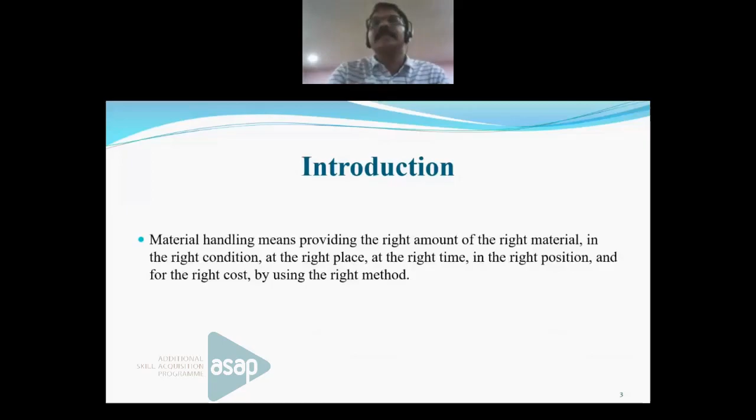So this is the fundamental introduction of material handling systems. Another aspect is it applies to the movement of raw materials, parts in process, finished goods, packing materials, and disposal of scraps.

So while transmitting or transferring materials, it may be in the form of raw materials, it may be partially working condition material or part in process, it may be finished work, it may be packing materials, as well as it may be scrap. Which means when we design any material handling equipment, it shall be capable of transmitting raw materials, in-process inventory, finished stock, packing material, as well as scrap.

Scrap is also very important because sometimes in big industries, scrap itself is huge. The weight may be huge. So the handling systems must be capable enough to handle the scraps as well.

In general, hundreds and thousands of tons of materials are handled daily, requiring the use of a large amount of manpower, while the movement of material takes place from one processing area to another, or one department to another department of a particular plant. That means huge manpower is required.

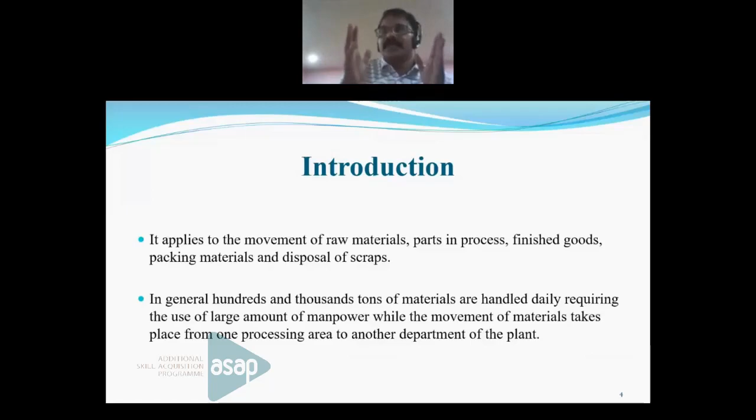Similarly, thousands of tons of material are to be transmitted. So it is very tedious work. We have to be very serious, and take it into serious consideration in material handling as far as an industry or a production plant is concerned.

So the basic definition of material handling is that material handling is the movement and storage of material at the lowest possible cost through the use of proper method and equipment.

Material handling means there are two aspects: one is movement, the second is storage. So whether it is raw material, process material, or finished goods, we have to move that material as well as safely store that material at a particular place, or keep that inventory.

So both of these aspects must be done effectively, and the cost shall be minimum, and proper method and equipment shall be used for transferring as well as storage of the material.

Another definition is material handling comprises all of the basic operations involved in the movement of bulk, packaged, and individual products in a semi-solid, solid, or liquid state, by means of machinery and within the limits of the place of business.

Sometimes we have to transfer bulk material, sometimes we have to transfer unit material like individual products. And the state, the property of the material may be liquid, may be solid, may be semi-solid. So according to the requirement, we have to design the material handling equipment for that particular plant.

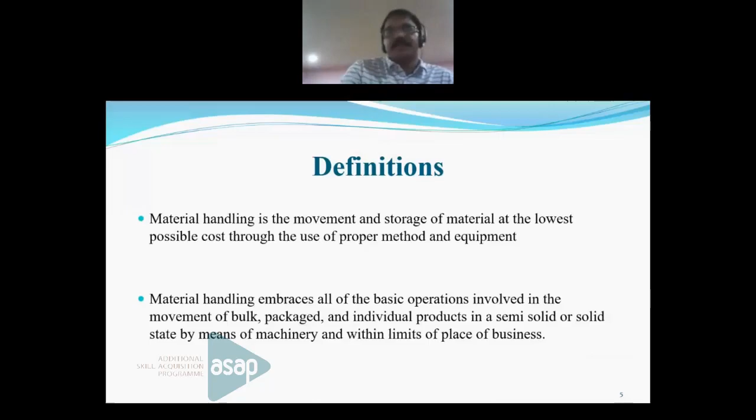The next one is the objectives of material handling. As I mentioned, the primary objective of material handling is to reduce the unit cost of production. If you take any manufacturing facility, the primary objective is to minimize the total cost or maximize the profit. In overall cost, one part is contributed by material handling. So if you reduce the cost of material handling, we can reduce the overall cost of production so that we can maximize the profit.

This is the main objective. Then the subordinate objectives are to reduce manufacturing cycle time. It's very important.

Reduce manufacturing cycle time - what do you mean by cycle time? Cycle time means the overall time required for completing a particular product. During that operation time, some time is definitely required for material handling. So if you optimize the time requirement, you can reduce the overall cycle time for the production of that material.

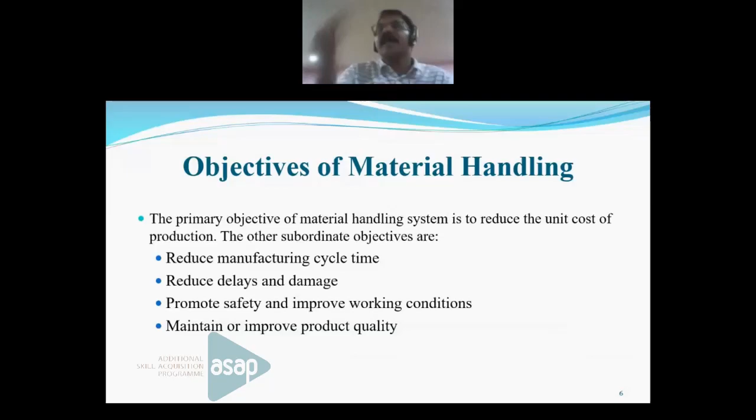Then another objective is to promote productivity. Productivity means we have to increase the production rate. In order to enhance productivity, we have to follow a straight line transmission - material should flow in a straight line, meaning we have to avoid zigzag movement and unnecessary movements.

So we have to decide an optimum path, and accordingly install or erect the material handling equipment. Material should move as short a distance as possible - that is also very important. While transmitting material from one place to another, there are different paths, so we have to optimize the path so that the distance moved is minimum.

That is another objective. Then the third objective in this session is to use the gravity concept. Wherever we can implement the gravity concept, we can use it so that we can reduce energy and power requirement, because no energy or power is required if we utilize the gravity concept. We can transfer material from a higher level to a lower level using some path, following the gravity concept. If we can implement that procedure wherever possible, we can reduce energy, and that will also enhance productivity.

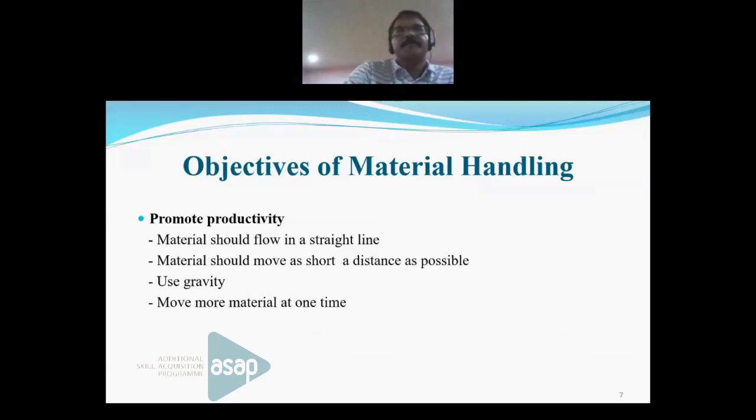Then another aspect is increase the use of facilities. We have to enhance facility utilization. The first point is promote the use of building cube - we have to utilize whatever building area is available. Then purchase versatile equipment - versatile equipment means equipment that can perform different operations. Instead of using a single operation, we can purchase equipment that can be utilized in different environments and situations. So purchasing versatile equipment is very important.

Then develop a preventive maintenance program. Preventive maintenance, as we all know, is routine maintenance in order to avoid a breakdown. According to the requirement of different material handling equipment, we have to design different preventive maintenance programs. For a particular material handling equipment, one procedure may be followed, but it may not be suitable or effective for another. So for another material handling equipment, we have to design another preventive maintenance program in order to avoid breakdown.

Then maximize the equipment utilization. As we all know, equipment is available to us for 24 hours, so we have to utilize the equipment at the fullest level. These are the objectives that come under this particular category - promote increased use of facilities.

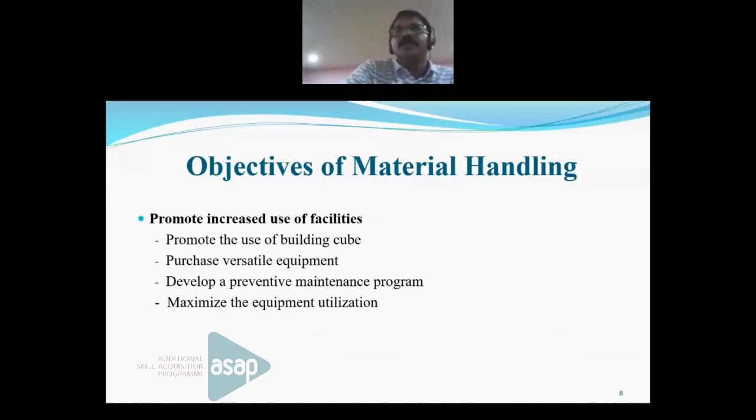Next topic is material handling, selection of material handling equipment. There are different factors to consider. First is the properties of the material, whether it is solid, liquid, or gas, and the size, shape, and weight. According to this heterogeneity, we have to design the particular handling equipment.

We have to take all these factors into consideration while selecting equipment. The second point is layout and characteristics of the building. Suppose for a particular plant the roof level is low, so we could not implement heavy material handling equipment. If it is a multi-story building, we have to select equipment accordingly. So according to the layout and characteristics of the building and plant, we select the handling equipment effectively. The next one is production flow.

Production flow means, suppose if it is continuous production, job shop, or batch production, we have to use different techniques. Continuous production means mass production, where the same quantity and type of material is produced for a particular period of time. For example, for one month, the same nut and bolt, thousands or lakhs of them, are produced continuously. That is called mass or uniform production. In that scenario, we can use something like a conveyor belt, which is apt for that situation. So according to the production scenario, we design the material handling equipment effectively.

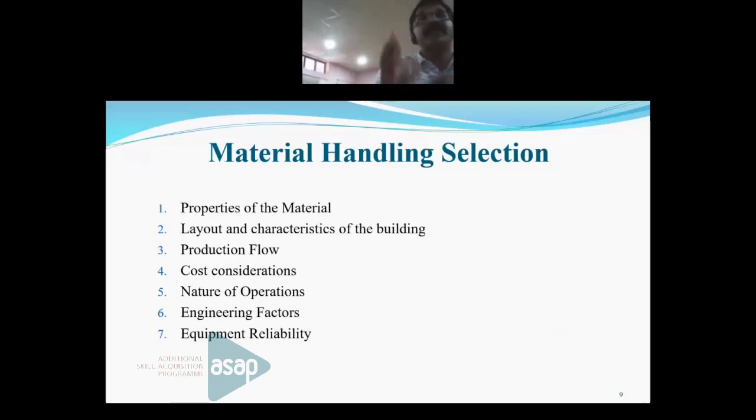In batch production, different materials are produced at a particular time, so different components are being produced. For this, we can use trucks for transferring material from one place to another. So according to the production scenario, we can differentiate and select the handling equipment accordingly.

Then cost consideration. According to the cost requirement, we can only purchase certain materials, so cost is an important factor while selecting any material handling equipment.

The nature of operations is also very important, somewhat similar to production flow. If it is mass production, we select material handling equipment accordingly, and if it is batch production, we select materials accordingly.

Then engineering factors, such as floor conditions and structural strength. If the structural strength is not rigid enough, we could not use heavy material handling equipment. So we have to consider the building strength, structural stability, door size, floor area, and the nature of the floor situation. All these things come under engineering factors.

Then equipment reliability is also very important. This means our equipment shall be reliable, so that continuous or frequent breakdown shall not occur. So when we purchase any equipment, we have to look into the reliability aspect seriously.

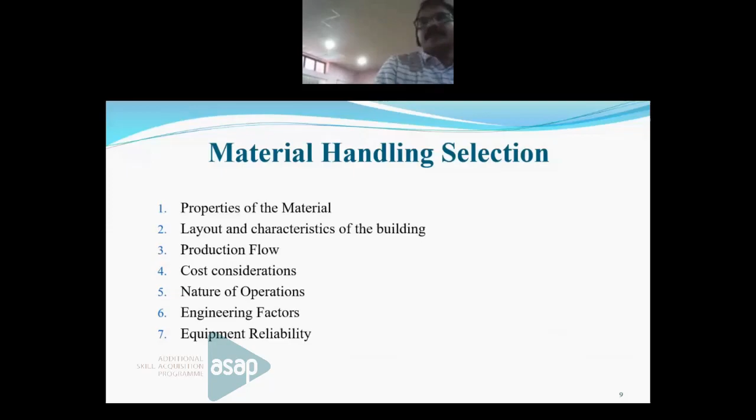Next topic is the importance of materials handling. This is a summary of what we have discussed so far. It improves the efficiency of the production system, it is self-explanatory, it cuts down indirect labor cost, and it reduces damage of materials during storage and movement, as I mentioned earlier. It maximizes space utilization for proper storage of materials, thereby reducing storage and handling cost. Using this, we can reduce the overall cost.

It will minimize accidents during material handling, which is a very important safety aspect. It reduces overall cost by improving material handling, and it also improves customer service by supplying materials in a convenient manner for handling. So these are the importance of material handling.

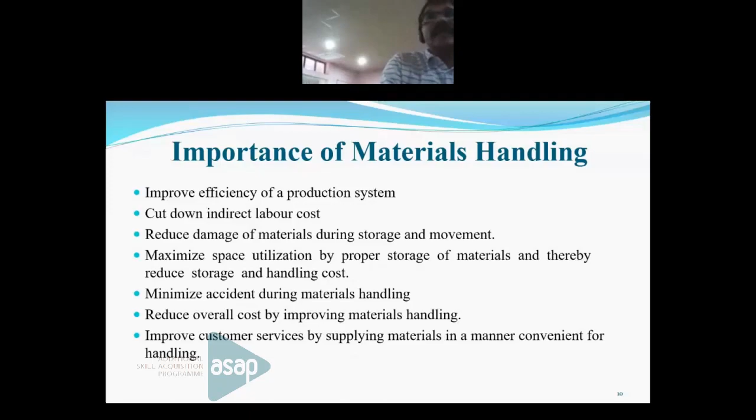The next important topic is what are the factors to be considered while designing a material handling system. The first factor is material.

The form of material, whether it is gaseous, liquid, semi-liquid, or solid, determines how we classify the material handling systems.

If it is a liquid material, or toxic or corrosive type material, we can use containers. If it is semi-liquid or powder type, we can also use containers for transferring materials from one place to another. If it's a solid one, we can use overhead cranes, hoists, winches, or trucks for solid materials.

The next aspect is nature, whether it is bulk, unit load, individual items, fragile, sturdy, or bulky.

What is a unit load? Unit load means the same material, same dimension, and the material looks similar. For example, take a brick - that can be considered a unit load, since different bricks have the same size, dimensions, and appearance. Similarly, if you place 10 of those same bricks in a casing, that may also be considered a unit load, loaded onto a particular truck or wherever. That is what is meant by the unit load concept.

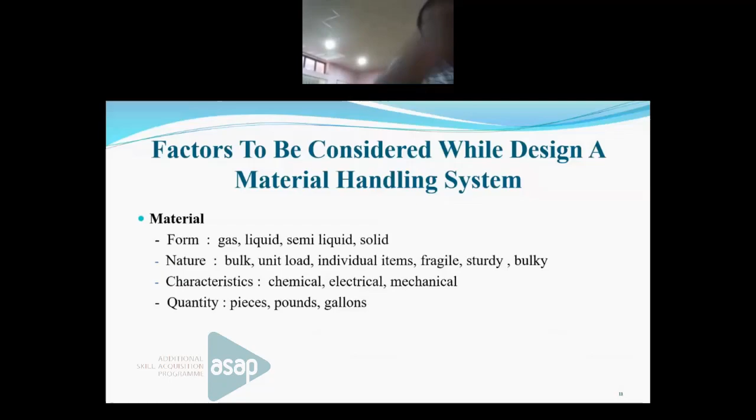Then quantity, whether it is in pieces, in terms of weight like pounds, or in liquid form like gallons. So quantity is another factor, and accordingly we have to design the system.

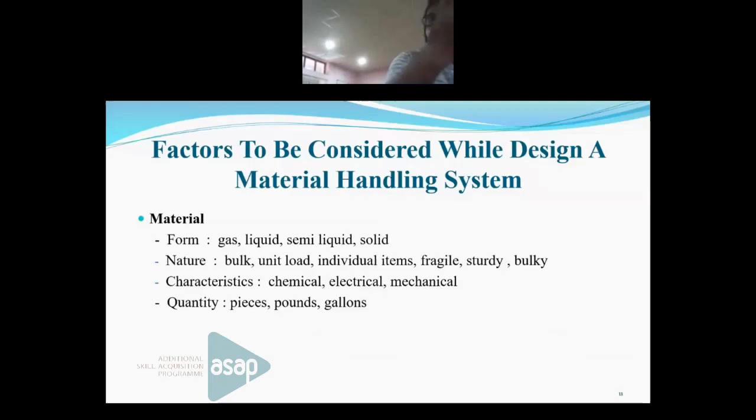The next important factor is the movement of the material - the source and destination. While transferring materials, we have to receive the material and stock it, or keep it in a warehouse. Then it may be transmitted to the shop floor. After completing the work, it may again be stored in the finished stock room. So source and destination - throughout, movement is there, and we have to consider this factor for the design of the equipment.

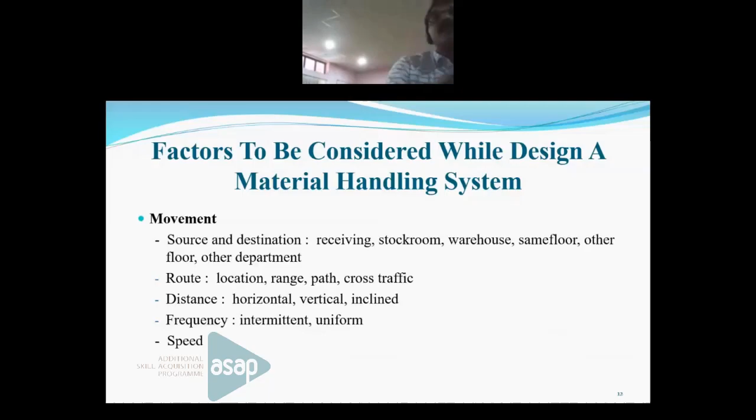The next one is the route - meaning the location, the range or path, and cross traffic. This is an important term. In many industries, during material transfer, simultaneously different types of materials are being transmitted or transported at the same time. So we have to avoid cross traffic - when a particular heavy material is being transported from one place to another, we shall avoid cross traffic in between. So we have to design an optimum route or path for effective transportation.

The next one is distance - whether it is horizontal movement, vertical movement, or inclined movement. Accordingly, we have to design our material handling system. This is an important factor.

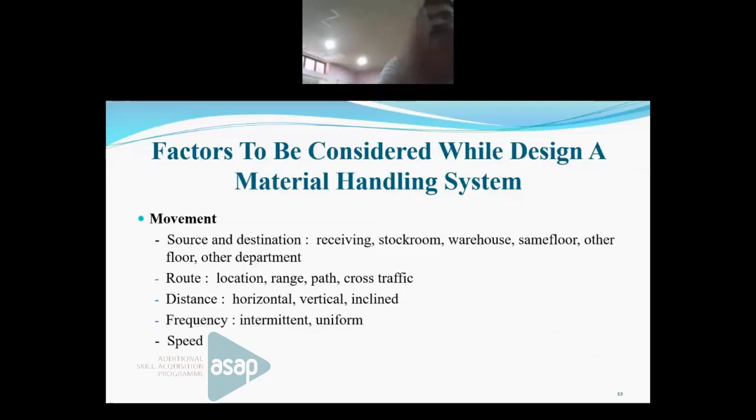Then frequency - whether it is intermittent production or uniform production, as I already mentioned. Uniform production means continuous mass production, while intermittent production also needs to be designed for accordingly. Then speed is also very important - the speed at which it is being transported is another factor.

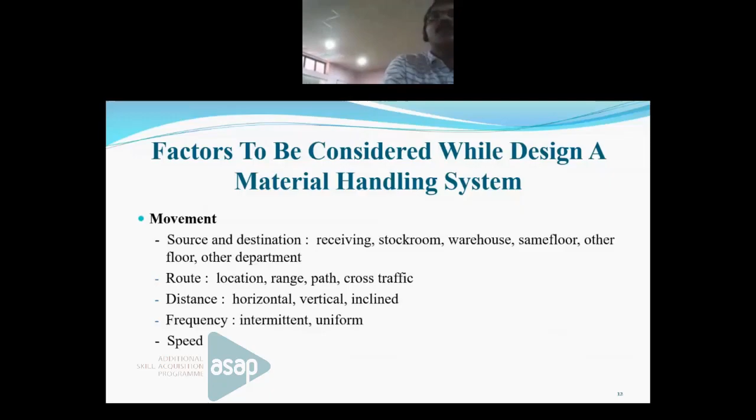Then another factor is methods - whether it is unit or load, manpower, or equipment. Whether it is bulky items, individual items, or container items, we have to consider this factor. Then manpower - whether it's a single man, several people involved, or none, meaning we can mechanize the system. Then equipment - conveyor, overhead cranes, forklifts, trucks. So different equipment can be selected according to the requirement.

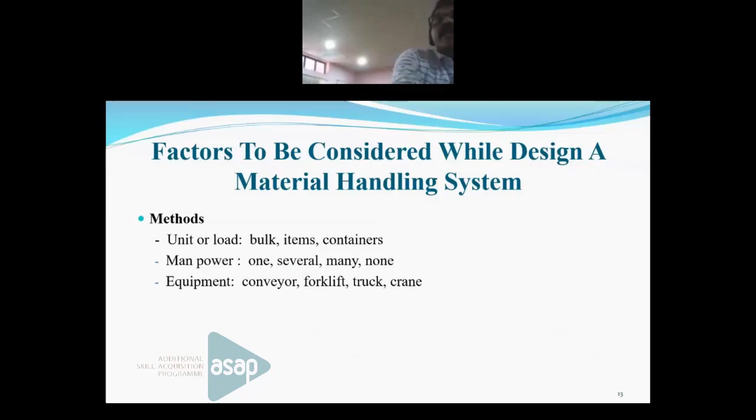The next topic is the systems concept of materials handling. The system concept means, if we take a production system as a whole, that may be considered as a system. But material handling is a subsystem of that main system. So in order for the main system to work effectively, the subsystem also has to work effectively. That's why the material handling area is very important as far as a production system is concerned.

Unless the material handling system works properly, the total system won't work effectively. So this particular area may be considered as a subsystem. There are so many subsystems, and all of them shall work together, synchronized, in order to improve the effectiveness of the main system. This is the system concept of material handling.

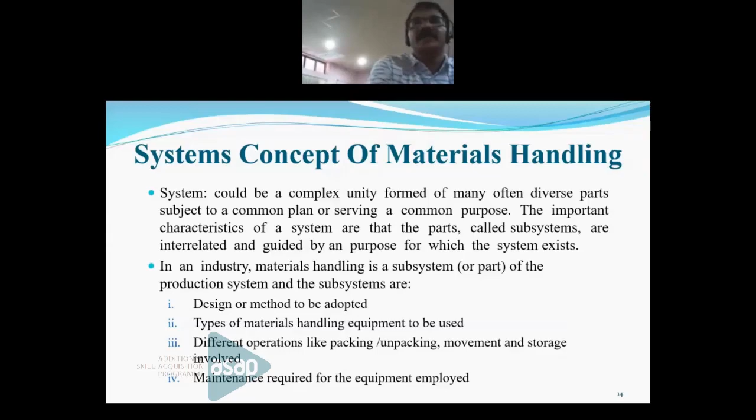Then types of material handling methods. There are 5 types. One is movement - this is the actual transportation, the actual movement of material from one place to another. The next one is quantity - how much we can transfer, how much volume we can transfer. This dictates the type and nature of the material handling equipment, and also the cost per unit for conveyance of the goods.

Next aspect is time - how quickly the material can be moved from one place to another. If we have to move very quickly, we have to select the handling system accordingly. Then space requirement - if the available space is very less, we could not erect big material handling equipment, so space is a constraint. According to the available space, we have to optimize the material handling equipment.

The next one is control. Control means the proper identification of the material, proper inventory management - all these aspects come under the control area. So these are the different types of material handling methods: movement, quantity, time, space, and control.

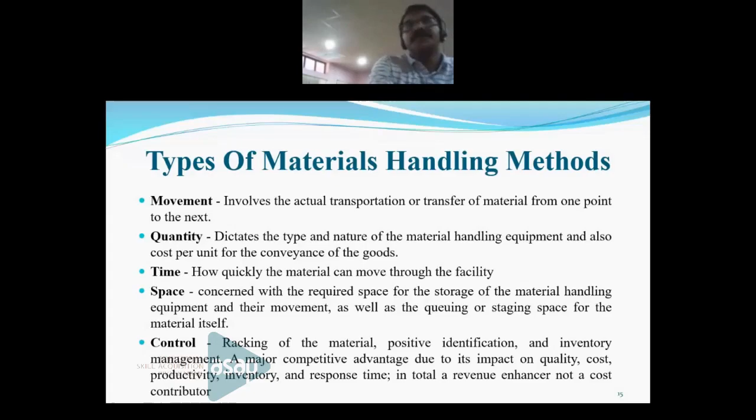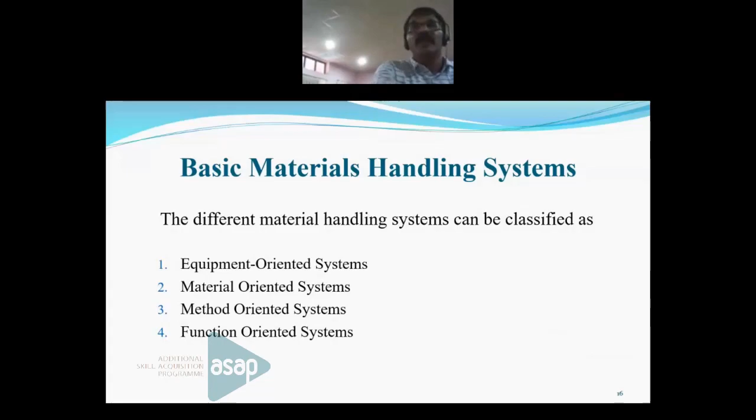Then basic material handling systems. The different material handling systems are: one is equipment oriented system, the second is material oriented system, the third is method oriented system, and the fourth is function oriented system. These are the four different material handling systems.

The first one is equipment oriented system. From the heading itself it is clear that it depends on the equipment used for transportation. One is overhead systems, like overhead cranes, jib cranes. Then conveyor systems - belt conveyors, roller conveyors. Then tractor trailer system, forklift truck and pallet system, industrial truck systems, and underground systems. These are the commonly used equipment in the material handling scenario.

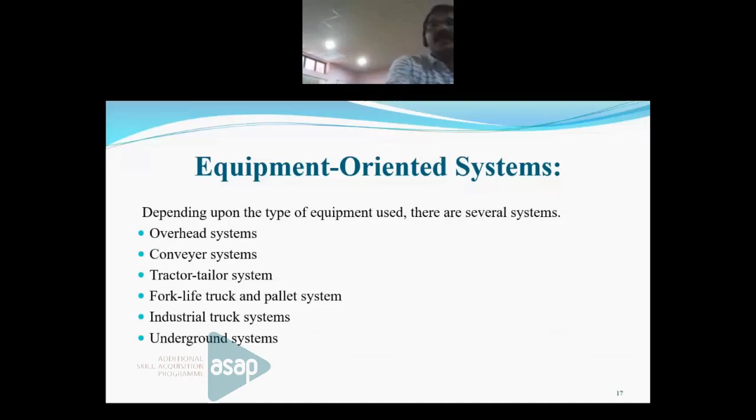Then another system is material oriented system. As already explained, unit handling systems - whether that particular equipment is handling units only. Unit means the same type of material, all similar, which may be transmitted from one place to another - that is unit handling system. Bulk handling system means it is not similar.

Then liquid handling system means the form is liquid. A unit load consists of a number of items so arranged that it can be picked up and moved as a single entity, such as a box. It may be considered as a box, bale, roll, etc. Such a system is more flexible and requires less investment, so the unit load concept can be followed because it involves less cost.

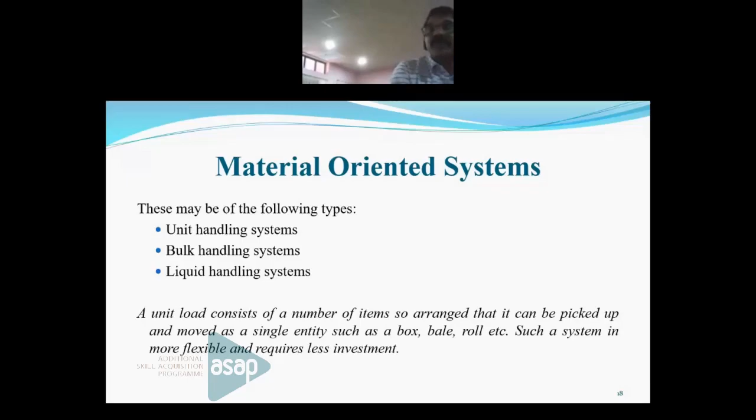Then another type of system is method oriented systems. According to this system, we can classify systems such as manual systems - there is no automation or mechanization, it is being operated manually. Then the next one is automated system. Then job shop handling system - job shop production means different types of materials are produced at a particular time. Then mass production means uniform production, the same type of products being produced at a particular period of time. So this is method oriented systems.

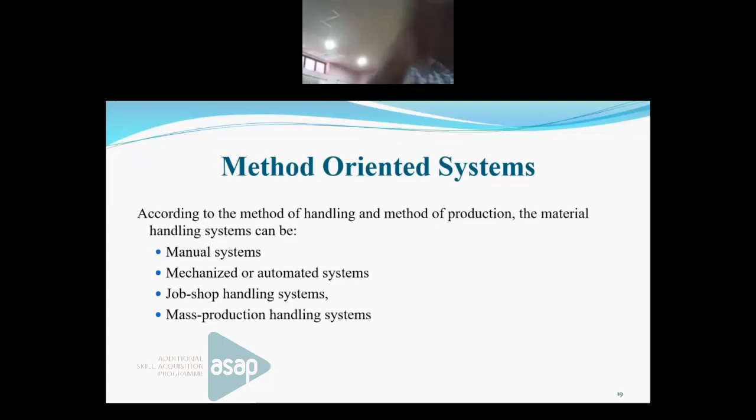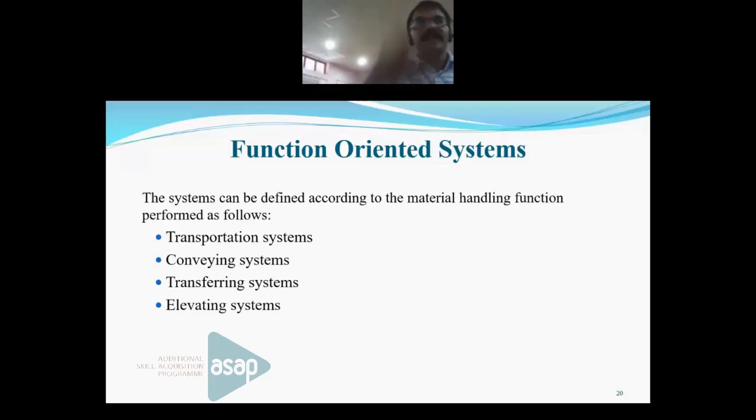Then the last one is function oriented systems. These include transportation systems, conveyor or conveying systems, transferring systems, and elevating systems - these are the four classifications of function oriented systems. Elevating system means material may be elevated from one point to another, raised in an elevator system. Transferring system means it is being transferred from one place to another place. Conveying and transportation are very clear.

Then factors affecting selection of materials handling equipment - all these points are self-explanatory.

Then load capacity. For a particular equipment, we have to ensure the maximum load capacity. Then speed, we already mentioned that. If the operation is done quickly, we can improve productivity as well as reduce cost, so speed is important. Then space requirement, already explained, whatever available floor area we have, we have to utilize that available space.

Then supervision required. The level of supervision, if it is manual, 100% supervision is required. If it is automated, that supervision level may be 10% or 5%. If it is partially automated, that level of supervision is required. So that also we have to take into consideration.

Then ease of maintenance. As I mentioned, maintenance of each and every equipment is very important. As we already discussed, we have to design a program for that preventive maintenance. So ease of maintenance is very important when we select equipment.

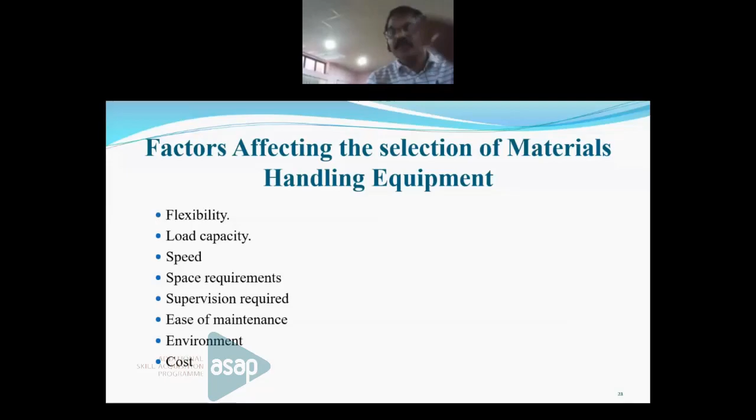Then environment is also a factor, cost is also a factor, this is self-explanatory. Then the last topic of our discussion is principles of material handling.

I mentioned around 20 principles. Part A is principles related to planning, and part B is principles related to equipment. This is a thumb rule. I mentioned 20 principles, but it may not be possible to implement all of them. Sometimes we cannot implement one principle in a particular situation, but that principle may be utilized in another situation. So that depends on the situation or the requirement, and we can follow these principles accordingly.

So the first one is the planning principle, it is very easy to understand. Then the system principle, I already mentioned.

Then simplification principle. Simplification principle means the equipment shall be simple, and the operation procedure shall be simple. So we have to follow this simplification procedure in order to utilize the equipment effectively.

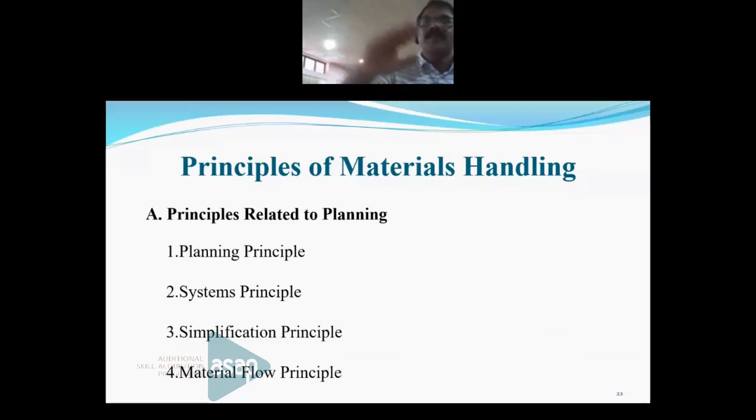Then material flow principle. Material flow principle means the smooth flow of material. We shall avoid zigzag movement and unnecessary movement. So the material flow shall be optimum, and straight line flow we can follow.

Already we discussed the gravity principle, already I mentioned it. Gravity principle means without using any energy or power, we can transfer material from one place to another using the gravity concept. The unit size principle also we discussed.

We can have a unit size of material so that the transportation is very easy. Then space utilization principle, I mentioned, we have to utilize the space optimally.

Then safety principle, it is also very clear. We have to use the safety guidelines according to the Industry Act or whatever it is, in order to safeguard the equipment and the human being. We have to follow the safety principle.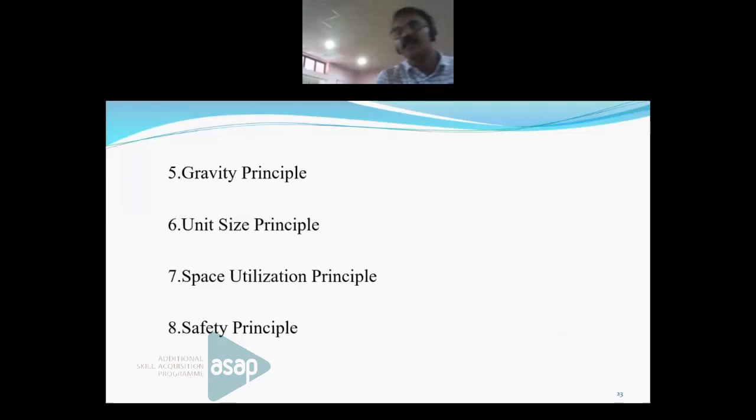These are the principles that come under the planning header. Then the remaining 12 principles come under principles related to equipment.

Then the mechanization principle. To what extent this equipment can be automated in order to improve efficiency and productivity, what extent we can mechanize or automate the equipment, that is what is called the mechanization principle.

Flexibility principle, we already discussed. Flexibility means that particular equipment can do different operations. It is flexible, it is adaptive. So that is what is called the flexibility principle.

Then the third one is equipment selection principle. We have to select the equipment according to the requirement, according to the effectiveness.

Then standardization principle. Standardization means some equipment is standardized, so we can operate that particular equipment safely and effectively even by an unskilled worker. So we have to follow the standardization principle wherever it is required.

Then the lightweight principle, it is very self-explanatory. We have to reduce the weight of the equipment as far as possible.

Then motion principle. Motion principle means the movement also we have to optimize.

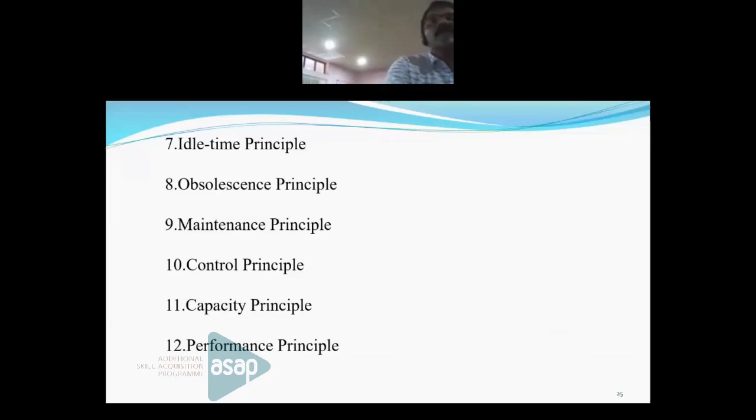Then control principle, then capacity principle, then performance principle. These are the 12 principles of material handling under equipment, and 8 more principles come under planning. So total 20 principles are there.

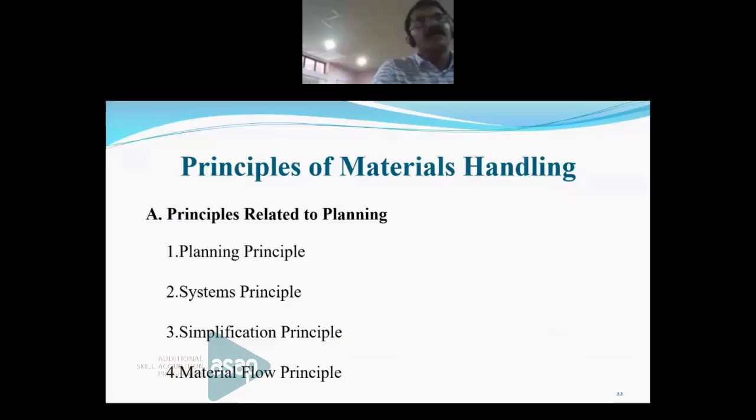As I mentioned, it is a thumb rule, so we have to use our wisdom according to the requirement. Then the last topic, the limitations of material handling.

Of course, additional investment is required, and then loss of flexibility to some extent. Breakdown may occur, and if breakdown occurs, the whole production will be stopped. Timely maintenance is required, unless we do the maintenance, the breakdown may occur.

So for maintenance, additional skilled maintenance manpower is required, maintenance spares, cost of maintenance, time requirement for servicing, and arrangement during this period to continue the production. So these are some drawbacks, some limitations of material handling.

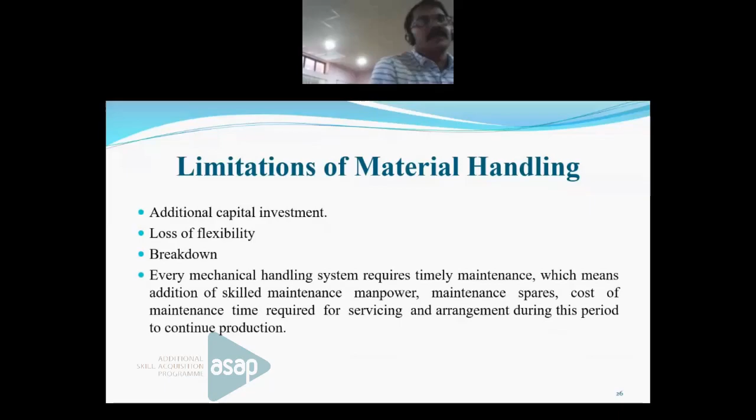Very clear, sir. The session was very clear, and we have reached the last 15 minutes of the session. Could you please conclude the session by giving an overall summary? Okay, sir. Then we will go on to the Q&A. Okay.

As I mentioned in the first part before introduction, in many industries this material handling area may not be considered seriously. That is an important aspect of any production scenario. I focused this particular session in view of production scenario, but this material handling aspect may be extended to many areas. I focused on manufacturing area, manufacturing aspect.

I focused to explain all these things, but this material handling area is very, very important. We have to consider it seriously, otherwise the total cost or the profit we cannot optimize. If we have a very effective material handling system, we can maximize the profit, we can reduce the cost.

As I mentioned, in system concept, this material handling is a subsystem. If you take the production scenario as a whole system, this material handling is a subsystem. We know that in system concept, if one subsystem cannot perform effectively, the performance or effectiveness of the whole system will break. We won't get the maximum effectiveness from the main system. So the subsystem also has to work effectively in order to get good results.

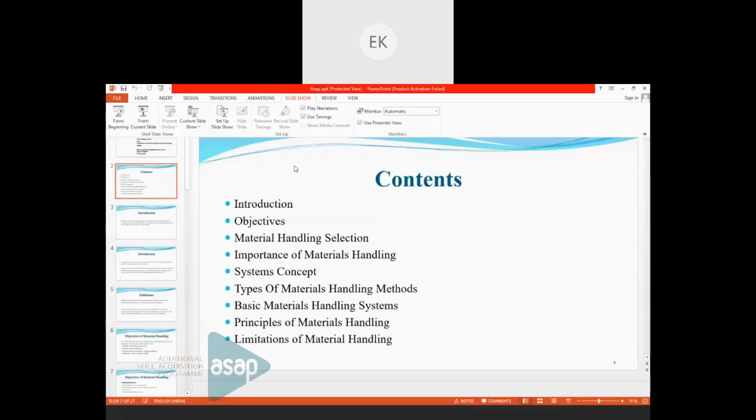And this unit size principle and gravity principle, as already mentioned, all these things are very, very important. That is being practiced in all industries.

So one important aspect is, out of these 20 principles, we have to select optimum principles for a particular situation. That is what effective decision making process is. So for a particular industry or production scenario, what all principles shall be utilized, what all things can be implemented in order to increase the effectiveness or productivity? Out of these 20 principles, we have to select the optimum principle for improving productivity. So that is a thumb rule, as I mentioned.

According to some experience, sometimes some trial and error method may be followed in order to select good principles. As an engineering student, as a mechanical engineering student, this material handling area is very important. Wherever you go, when you go to any industry, you will experience this aspect, material handling.

When we think about material handling aspect, we thought it is a very simple process, but it may not be like that. See, 1 ton, 2 ton or 3 ton materials may be transmitted in a restricted area without any damage. It is very difficult, so we have to design an optimum system for that. This area is very important as far as any mechanical industry is concerned. So that is the conclusion from my side.

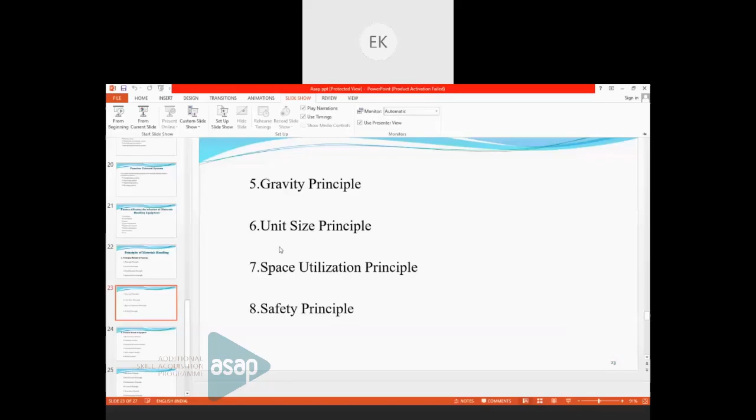Okay sir, that was clear. Another question is from Anish Abraham. He has asked how material handling automation is implemented in industries.

Safety is one important aspect. Nowadays in many big industries, huge materials are being transported from one place to another, and manual transportation is very difficult. So in order to enhance safety, productivity, and effectiveness, sometimes you have to go for mechanized systems. If it is a very small industry, the material handling system may not be automated, but if it is a big industry producing big products, we have to look into automation. But the level of automation also has to be decided, whether it is partially or fully automated, considering the safety aspect. Safety is very important.

I have received a question from Ebin. He's asking which is the best textbook for this topic.

Actually there is no single textbook for this. We have to refer to different textbooks. Many production related textbooks will cover these materials. Some ready-made textbooks are available, but I will not recommend those because they won't enhance your knowledge. To enhance your knowledge you have to read good textbooks. For material handling and facility planning specifically, there is no textbook to my knowledge, but good production related books are there where you will get all these ideas.

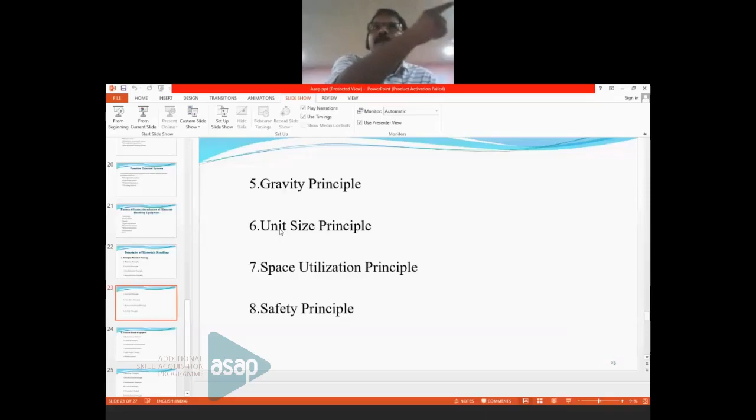Suppose in order to start the work at say 10 o'clock, we need to start the transportation of raw material or material handling at 8 o'clock. We assume it will reach within 2 hours. But during this 1 to 2 kilometer journey, different obstacles may come. The roads may not be that wide, obstacles come in between, so we have to redesign the arm of the vehicle to move it smoothly. Material handling is always a challenging area, and as I mentioned, it is very important to enhance the effectiveness of the whole system. So many updates and new inventions are coming in that area.